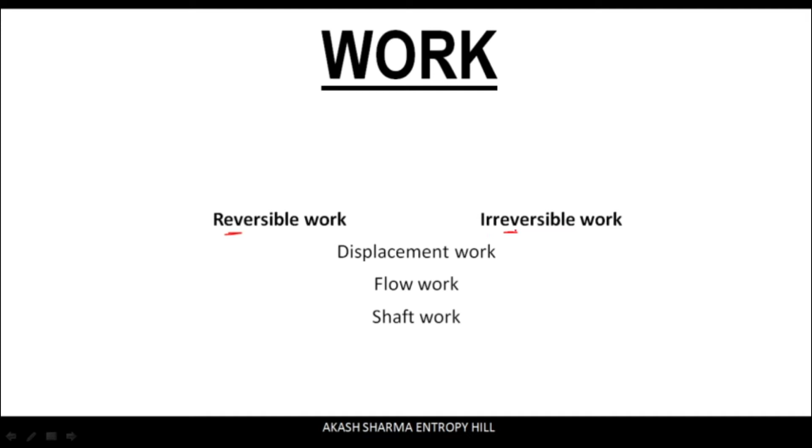Now in a closed system, this reversible work will be known as displacement work, but in an open system this will be called flow work. And how this flow work will be different from the shaft work, we are going to discuss in detail in the coming lectures. But from the mechanics point of view, you know very well that work is defined as the force multiplied by the distance traveled by the object.

Whenever this force is applied on that object, the unit of force is Newton, and the unit of the change in distance will be meter. So Newton meter is called joules. Now for this, displacement work is represented as pressure multiplied by change in volume.

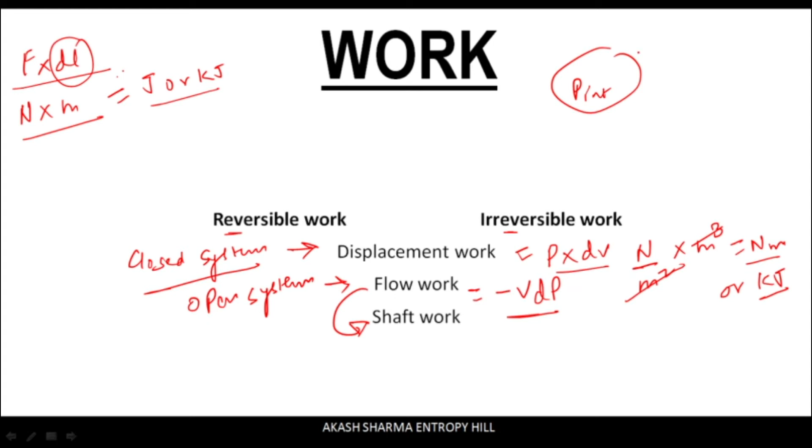So because of this difference in the pressure, we are obtaining this displacement work and flow work respectively in closed system and open system. Now you might be thinking that when this work is obtained because of the difference in the pressure, then why have you taken this pressure as constant pressure?

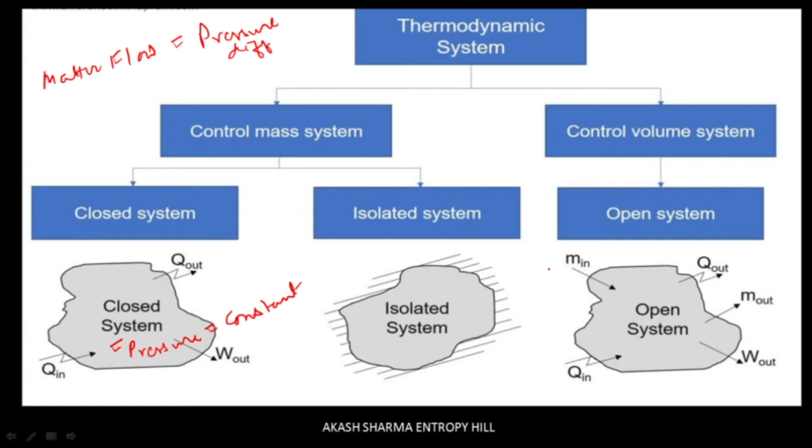Pressure is assumed to be constant. But in an open system, as the matter flows from inlet to outlet, a difference in the pressure is required. So we assume that the volume of the open system remains constant, but the pressure changes from inlet to outlet, and that is why open systems are also called control volume systems.

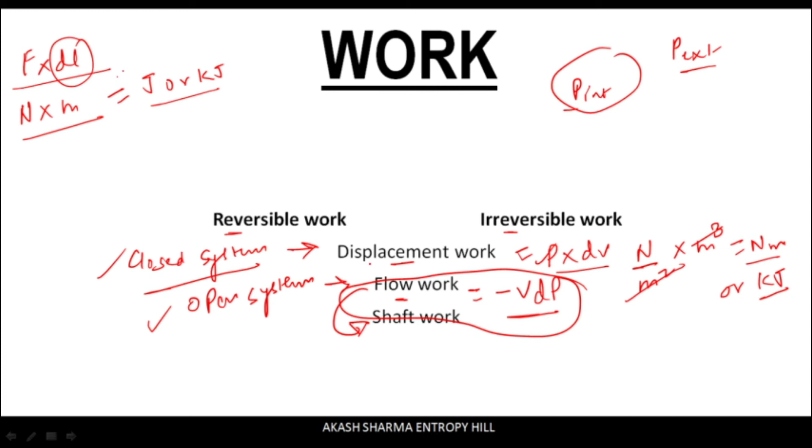And in closed systems the mass remains constant, so these are also called control mass systems. So now in an open system, where the volume remains constant, the flow work is represented by minus VdP, and in a closed system, where the pressure remains constant, it is represented by displacement work in the form of constant pressure multiplied by change in volume.

और यहाँ constant pressure का मतलब है that a constant resisting external force is continuously acting on this closed system.

But in case of a reversible process, every time this external pressure will be equal to the internal pressure of the system.

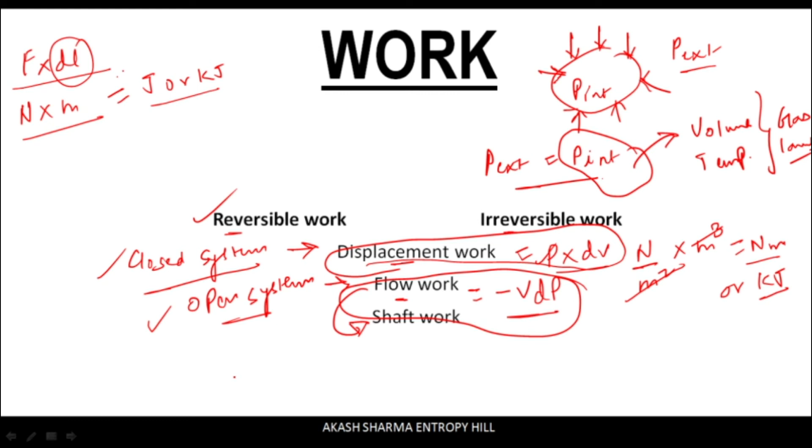Now what about the direction of this work? To understand this, the definition of work in classical thermodynamics is a bit different from the definition of work in mechanics. Because in thermodynamics, work is said to be done by the system if the sole effect on the things external to the system gets reduced to the raising of the weight.

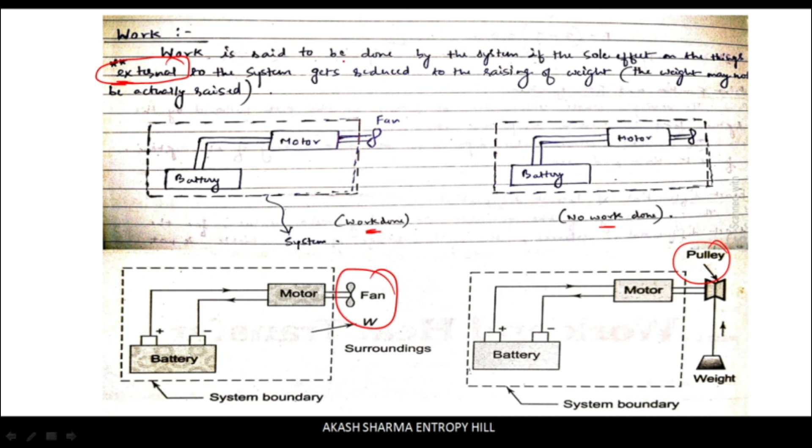अगर इस फैन को रिप्लेस करके एक पुली कनेक्ट कर दी जाए, now this motor will rotate this pulley such that this work gets reduced to the raising of weight. ये वेट उठाने की कोशिश करने लगेगी ये पुली, और उस केस में बोला जाएगा that work is done by the system according to thermodynamics.

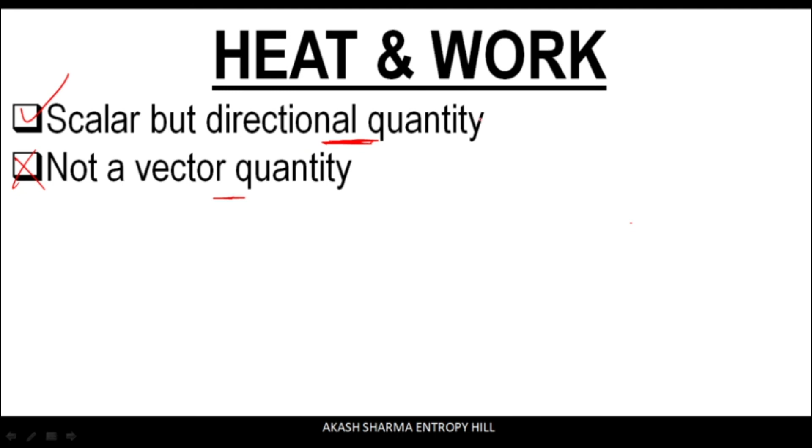Now when I say the direction of the heat and the work, that doesn't mean that heat and work are vector quantities, because heat and work are scalar quantities only. But in thermodynamics, heat and work are defined as directional quantities. And these directional observations form the requirement of sign conventions for heat and work.

Now the magnitude of this work will depend upon the type of the system as well as on the type of the process, but because it is a form of energy which exists in motion, its unit can be written as kilojoule, and on a per unit mass basis it can be written as kilojoule per kg. Now the direction of this work will depend upon the various driving potentials.

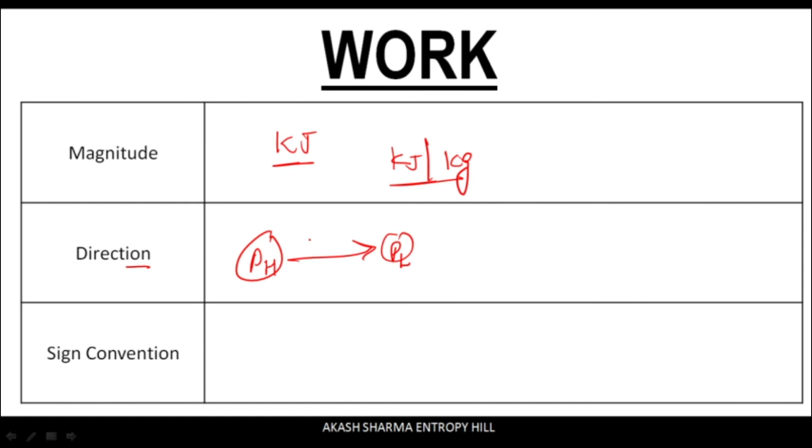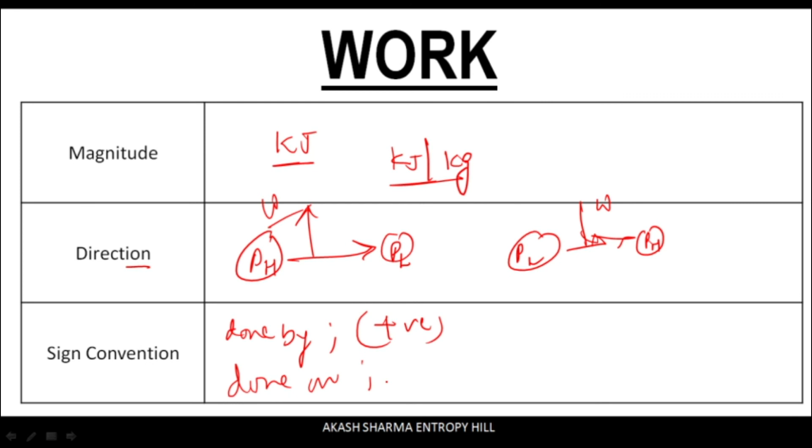Let's suppose a case, a higher pressure region to a lower pressure region, and that will be a spontaneous process, and that can be viewed as the system doing work. So when the work is done by the system, that will be taken as positive. And to take the object from a lower pressure region to a higher pressure region, work has to be done on the system. So when work is done on the system, that has to be taken as negative.

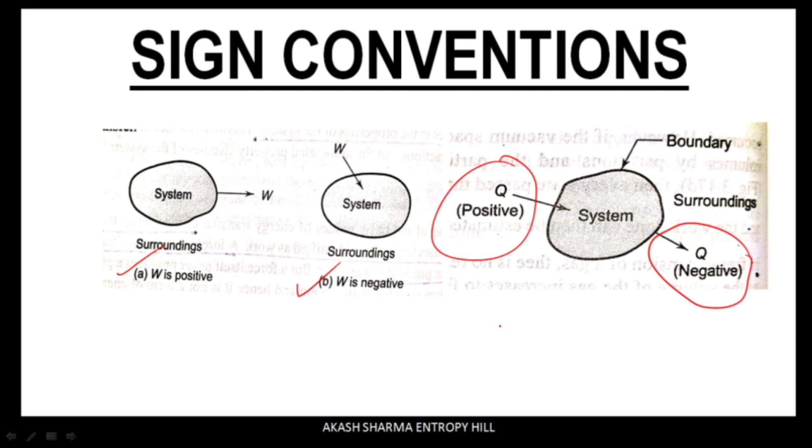So finally, the sign convention for work transfer will be: if the work is done by the system, then it will be positive. If the work is done on the system, then it will be negative. Similarly, if heat is added to the system, then it will be positive, and if heat is lost from the system, then it will be negative. So in the next lectures, we will try to explore some more concepts and terminologies about this subject.